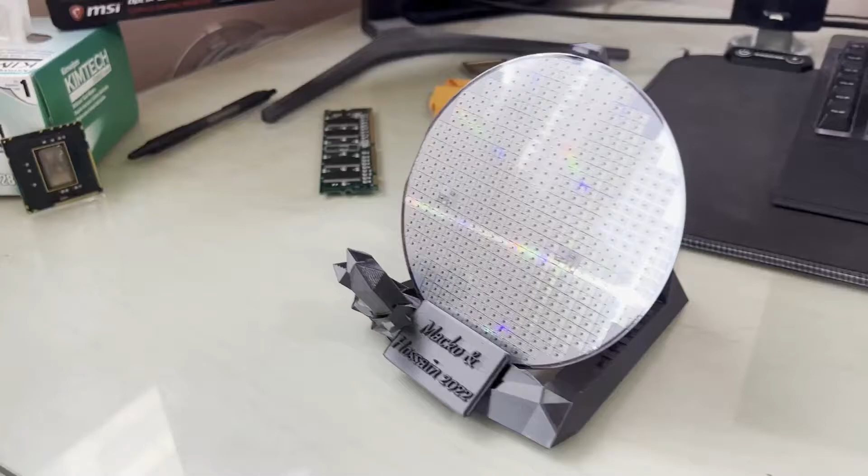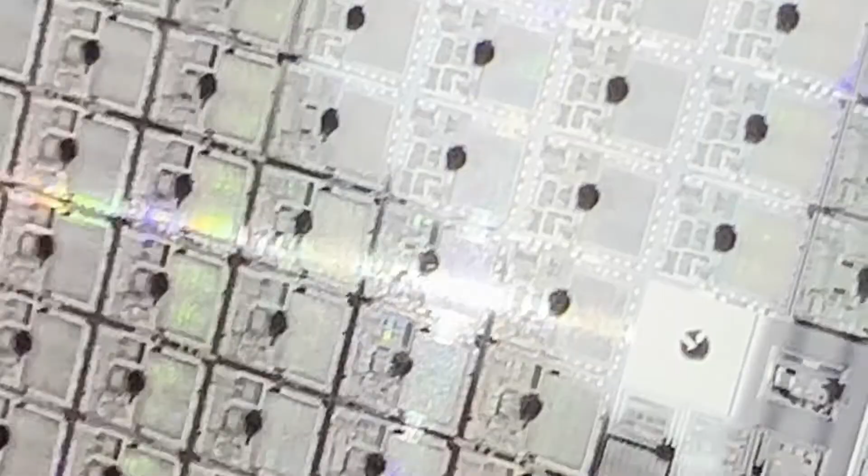So, a while back, I was invited to the wedding of an old friend of mine who used to be a silicon design engineer for Advanced Micro Devices, or AMD for short. I wanted to make something personalized for his wedding, and given that he was a silicon design engineer, what better gift than a chunk of silicon? But not an ordinary chunk of silicon. Silicon with very, very small, and if it'll let me zoom in, intricate designs.

So these designs, or what you see on this board, ultimately make their way into the silicon chips found in a lot of computers or laptops or mobile phones or even some smart fridges. So the point of this video is to essentially show how I went about designing this gift, the tools I used, I guess you could call it research process, and ideally, if you wanted to replicate this, how could you go about creating your own personalized gift? Oh, and yeah, of course, the other iterations that preceded it as well.

So first off, we need to actually get a silicon wafer. There's a couple different places you can buy these wafers, but most commonly you'll find them coming and going on eBay. I personally bought what I believe is a 5-inch disc, but you can get them as large as 12 if you wanted to. Although I caution buying larger discs because of how fragile they are, and larger objects cost more and are more prone to mishaps due to accidental handling errors. But in any sense, yeah, you can buy one of these or even a set of 5 for around 100 US dollars if it's a smaller disc size, and it's not too unreasonable.

Now, my friend in particular used to work for AMD, and as a result, I tried to find wafers that were meant for the 7 nanometer MOSFET technology node, but unfortunately, the only ones I could find were 12 nanometers that were also from AMD. Nonetheless, I don't think this technological difference is going to necessarily translate into a noticeable visual difference. So on that note, I bought a set of 5 of them from eBay. Unfortunately, the listing is no longer active, but as I mentioned, you can simply go on eBay and find whatever wafers look the nicest to you. It's purely subjective because I doubt you're going to be using these in any kind of CPUs.

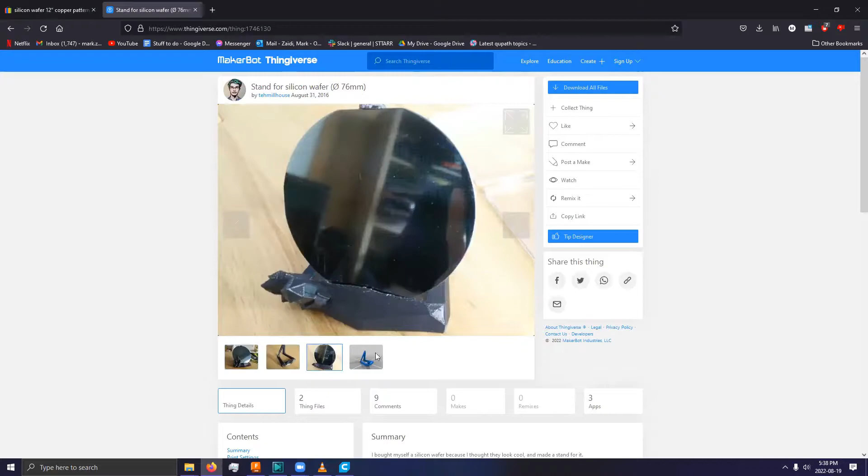Now, the wafers I had were not the same size, and furthermore, I also wanted something personalized, like a little piece of text. So what I did instead was I simply downloaded this design and rescaled it to match the diameter of my silicon wafers, and then modified it slightly in Autodesk to add a nice little plaque around here. But as you can see, the author did quite an amazing job in terms of the design. I really appreciate this little silicon crystal architecture. And as you can actually see, he got the silicon wafer from eBay as well.

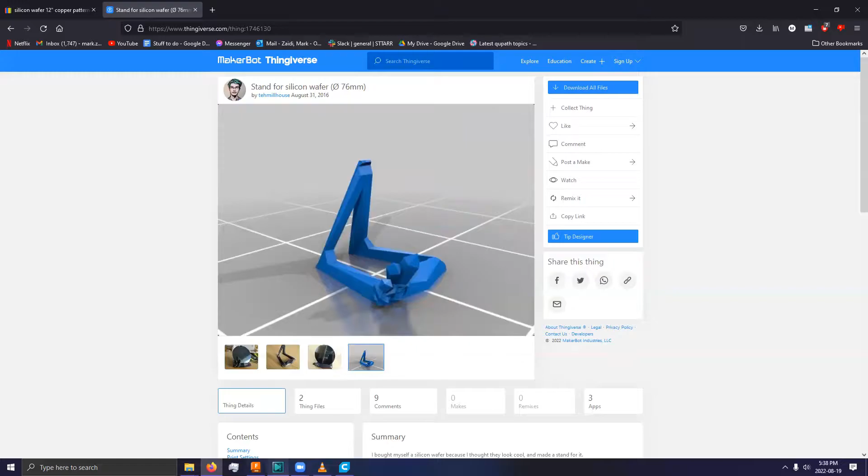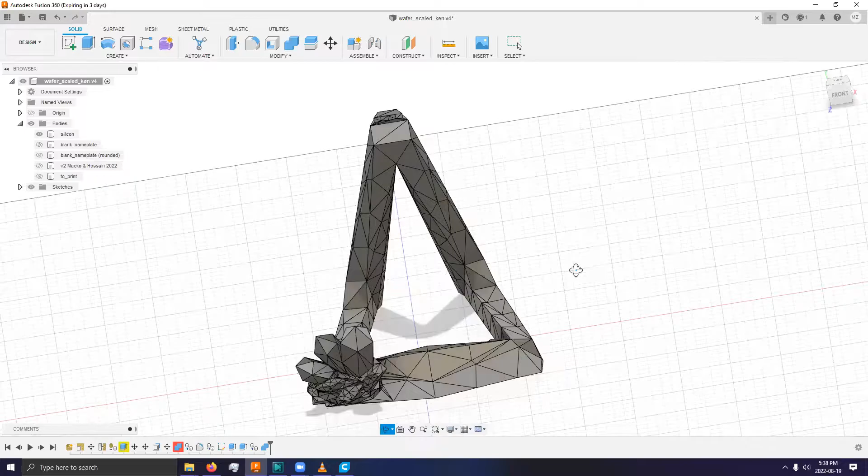Now that we've got this, we can load it into any kind of CAD software. In this case, I opted for Autodesk Fusion 360. After rescaling it, I remeshed the mesh, just to give some nicer, clear polygons. And this is what we have. Now, ideally, I wanted a nameplate somewhere around this area, and this is kind of what you can see. I opted for a nice blank nameplate. You can also round the edges.

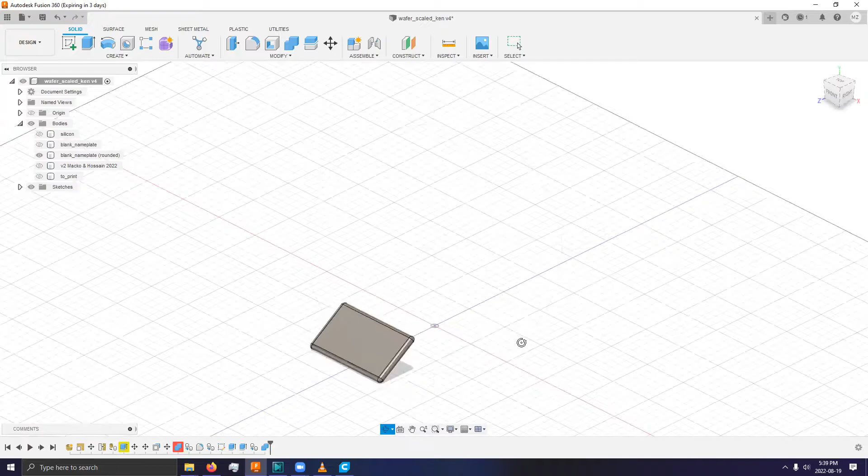Personally, I find rounded edges are generally easier to print with a 3D printer in that, well, rounded edges just appear more rounded, whereas sharp edges never really turn out the way you expect. Usually there's a bit of blobbing on the corners. The other issue is sharp edges, if unsupported, are more likely to fail during a print, whereas rounded ones are just generally easier to print.

Anyways, now that we have a plaque, we can add whatever text we want. In Autodesk, you have the ability to add your own text. I believe it would be under, when you create a new sketch, or you might not even need to create a new sketch. No, you do need to create a new sketch. So yeah, you can create text. There's a wide variety of different font sizes. I like this kind of italicized font, but any font generally will do.

Just, again, avoid any sharp corners or fonts that have very thin lettering, because the resolution of the printer, at least laterally, is about 0.4 millimeters. So, it's a cheap $300 Ender 3 with some modifications to it. It's not going to print outstanding quality products. But working with what I had on hand, this seems to be a reasonable size. And then we finally combine the two together, and we'll get something like this.

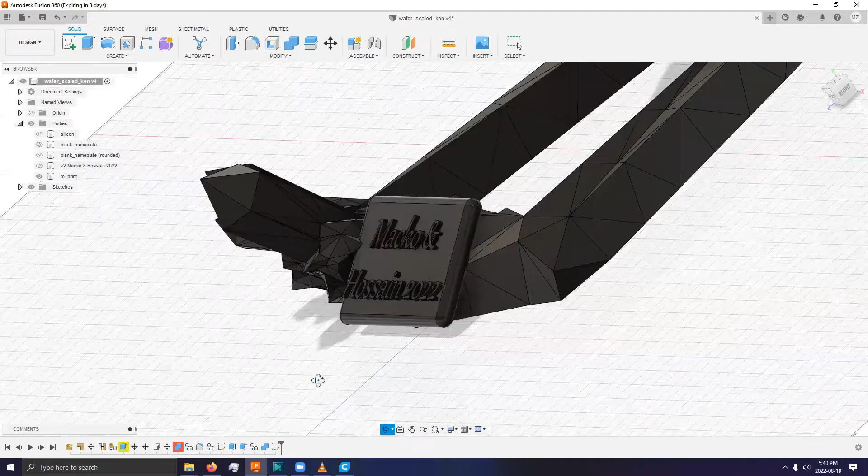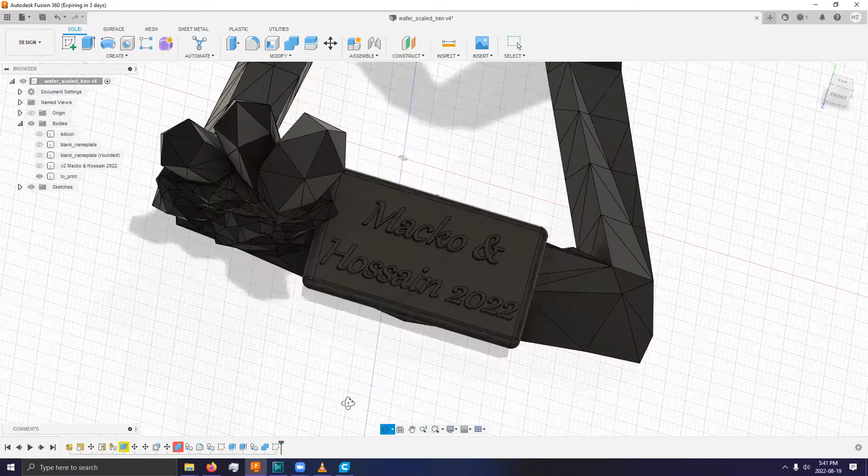Ignore the change in color. I was just trying to render some different materials. But yeah, you can see it seems pretty nice. And of course, in rendered software, it'll have an amazing gloss, which when you 3D print is almost entirely lost. But you do have a bit of interesting patterns in terms of the way light scatters when you look at 3D printed objects, given that they have layer lines that are fairly small.

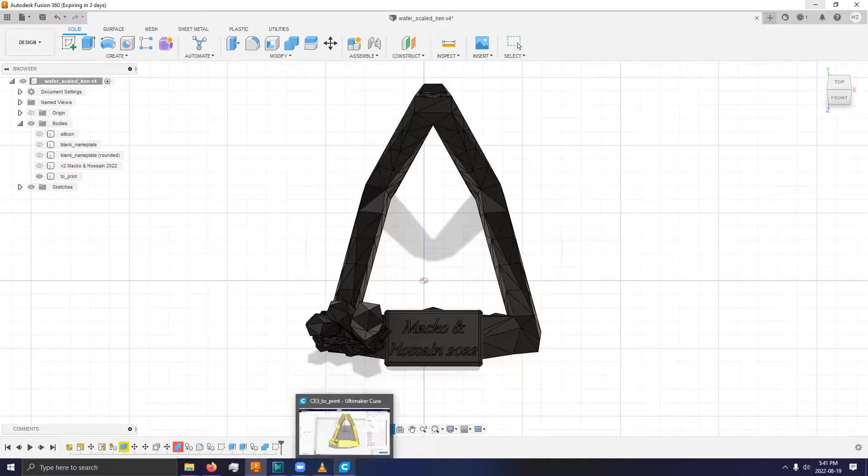So now that we're all set on our design, and also I can make this file available on request if you guys wanted, but I don't know how much of a demand there is for something as specialized as this. Anyways, now that we have our design, the next thing is to actually set up the print.

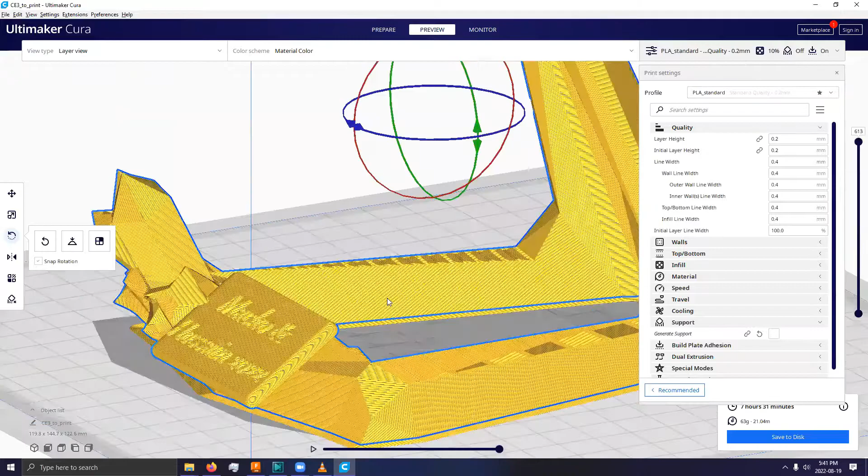So when we load it in Cura or whatever print software you intend on using, you can slice it with a 0.2 millimeter resolution. Personally, I usually try and test stuff out using 0.2 millimeters, but then for the final product, I usually opt for something lower, like 0.1.

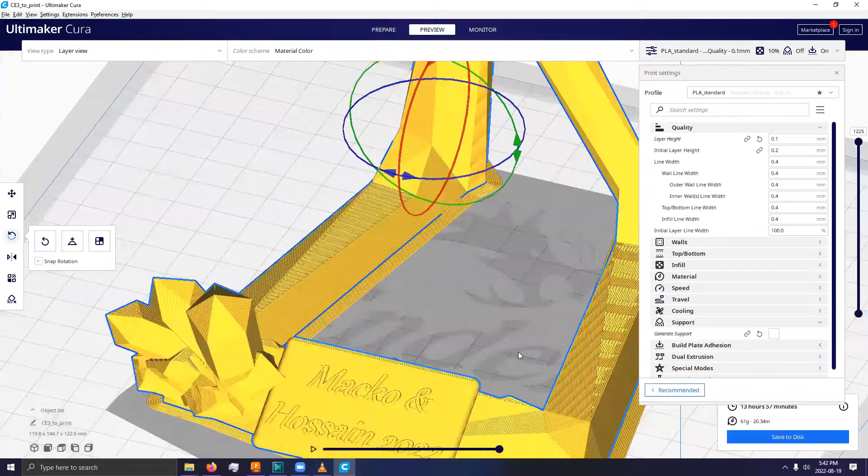Now, of course, it'll take longer to print, but generally the amount of plastic used will remain more or less the same. And at the end of the day, unless you have a huge backlog of stuff you wanted to print, a print that takes 8 hours or a print that takes 16 or 13 or however many hours, it's not going to make a big difference. And you do have a nice higher resolution.

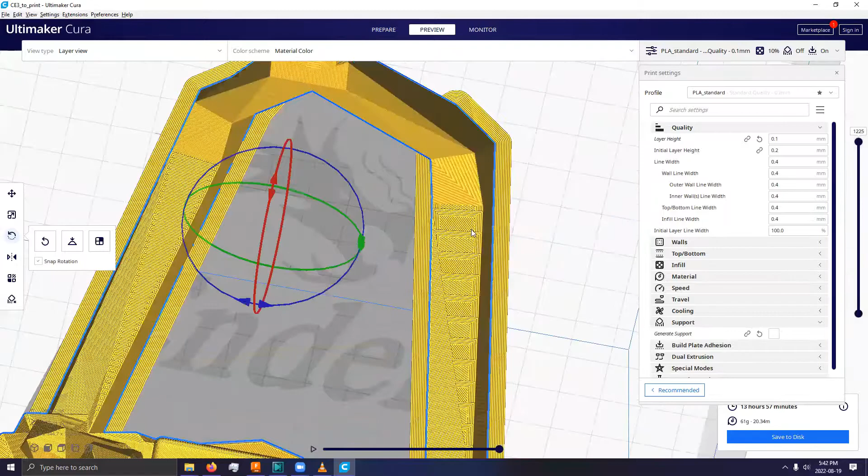Like, as you can see, the steps over here are a little bit more frequent. And at the end of this video, I'll show some examples of the finished product, but it's much more noticeable, the kind of shiny gloss effect from the very, very small layer lines, as you can see here. So on that note, unless I'm missing anything, yeah, I guess we'll call it a day for now.

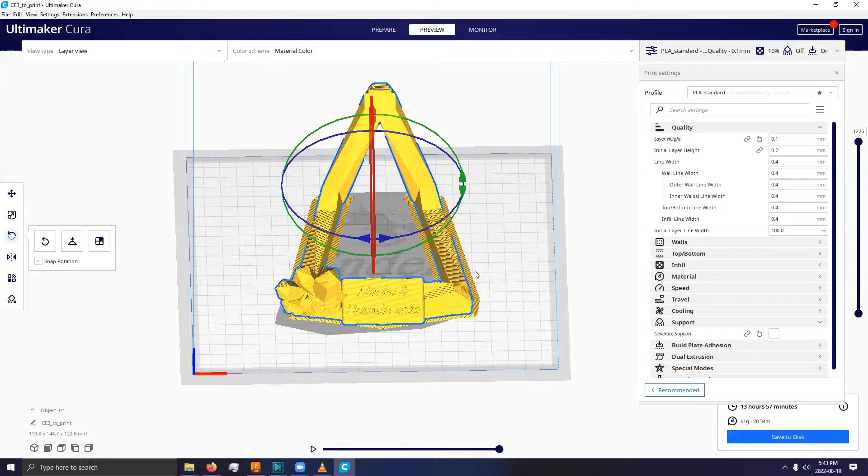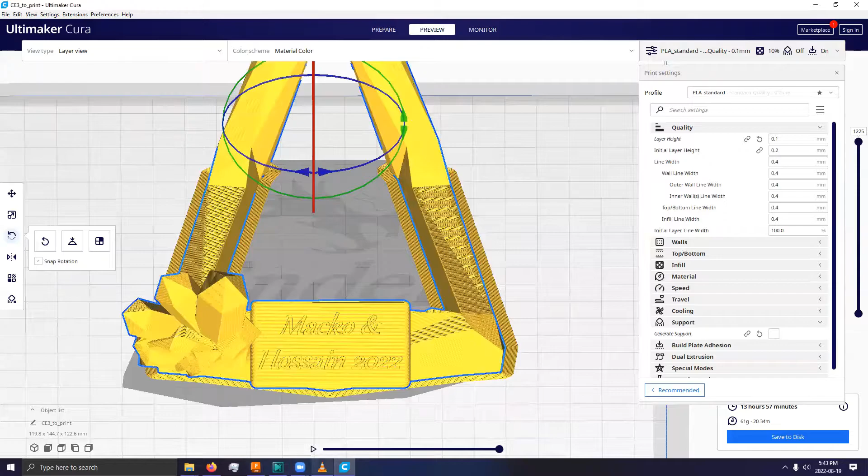And then I'll quickly show off some examples of the finished product with one silicon wafer that I might give. I still haven't decided which of the 5 looks best, so I'm also open to feedback. I was also thinking of painting this text over with a nice gold color, just to give a little bit more contrast between the actual text and the nameplate itself.

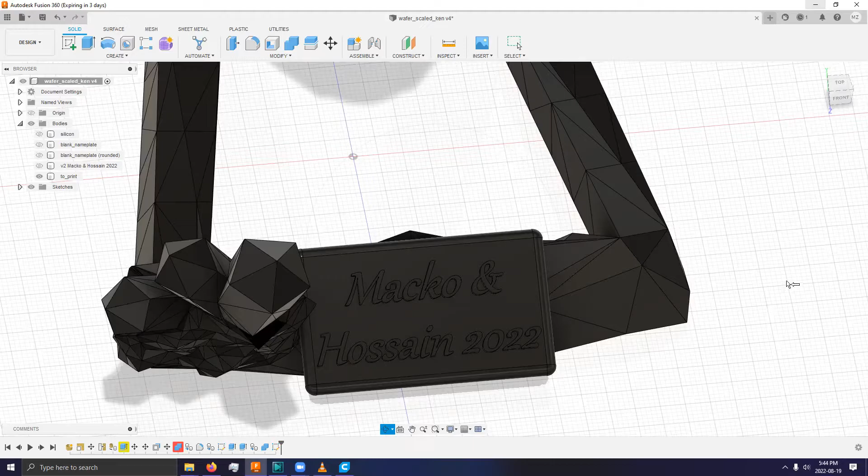Only challenge here is it's a manual step. If I have to go in with acrylic paint, I'm very prone to making a human error. Any slight human motion that might perturb the setting of this acrylic paint can make it look relatively poor quality. So I'm still thinking of a good way to add gold lettering without having to use a very, very fine brush and carefully paint over the lettering. But if it should come to that, it's understandable. Anyways, let's take a look at some of the finished product.

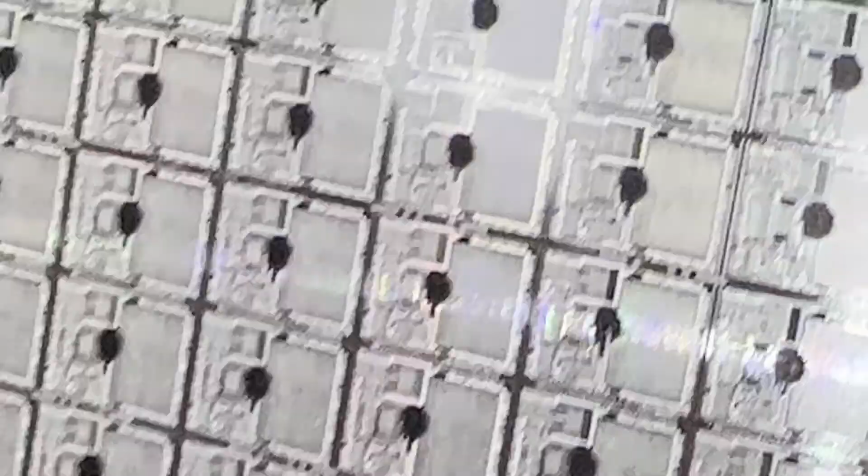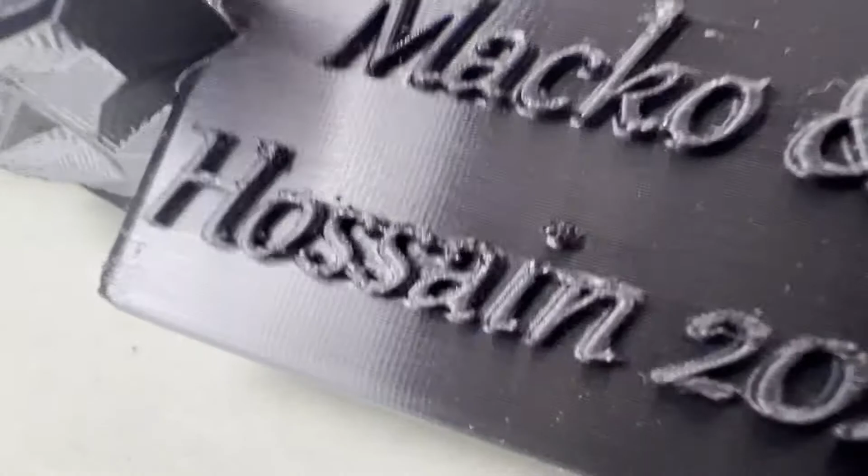This is one of the 5 wafers that came with the order. Nothing really wrong with the wafers themselves. Honestly, they're great quality, very interesting designs, beautiful iridescence. Now the actual print itself, the text isn't perfect. It's definitely legible, but as you can see, the I in Hossain kind of blobbed up a little, as well as some smaller pieces of text. Again, not the end of the world, but going forward, I might have opted for a different font.

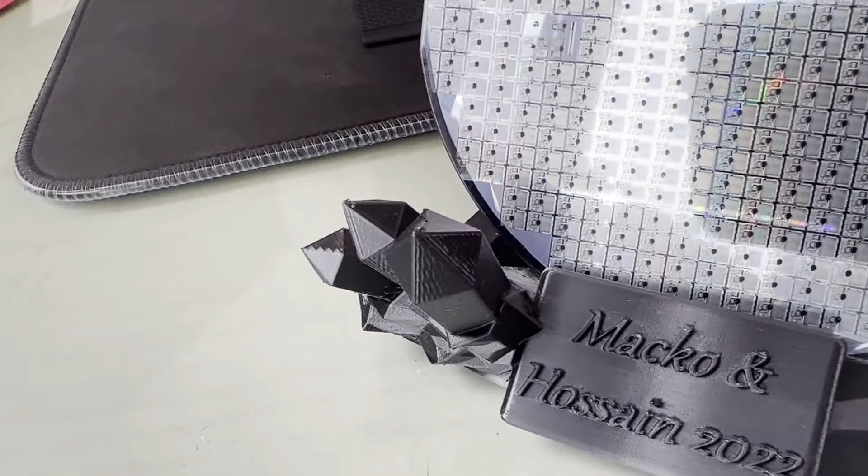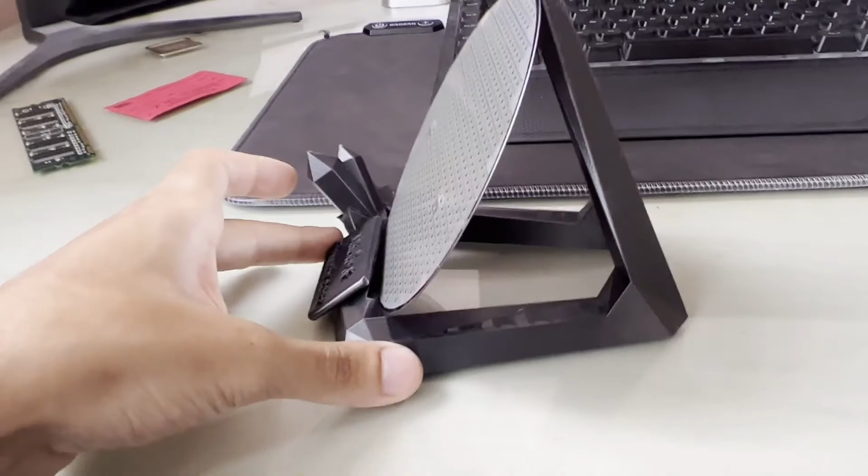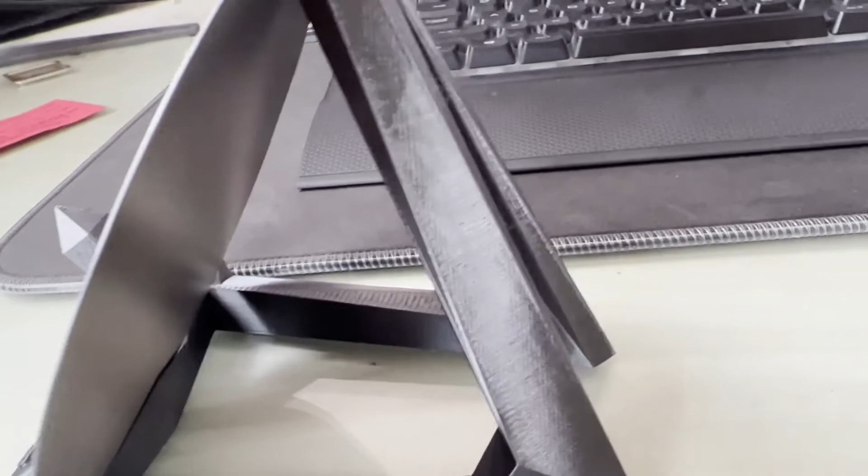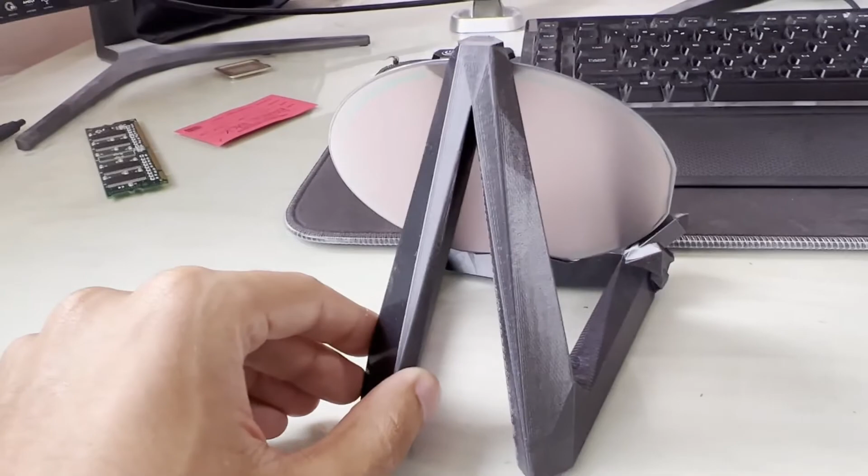Now, if we look at the crystals, they're pretty good, as long as you don't zoom in super into a corner or something. If we take a look at the back, also very nice. And yeah, this is the kind of, well, not iridescence, but reflectance, scattering of light, I don't know what the proper term would be, of having a 0.1 millimeter layer height. So it gives this nice kind of glossy finish, but at the same time, it's not glossy. It's really hard to describe because I haven't really seen this kind of texturing on any other materials other than 3D printed parts.

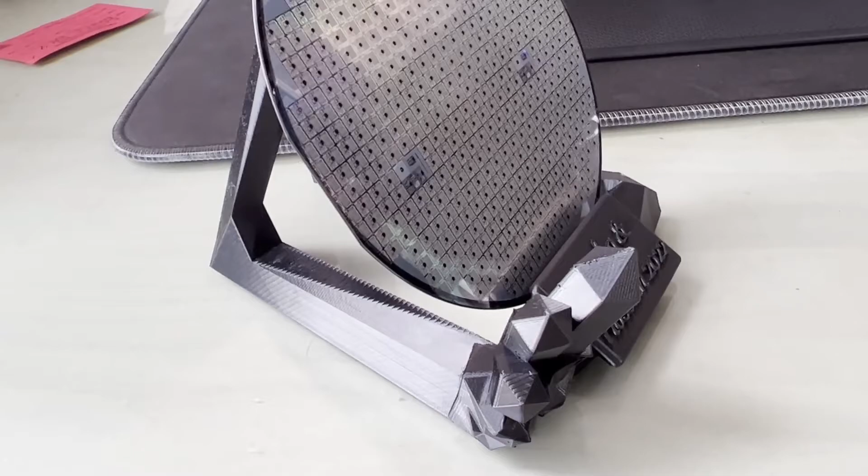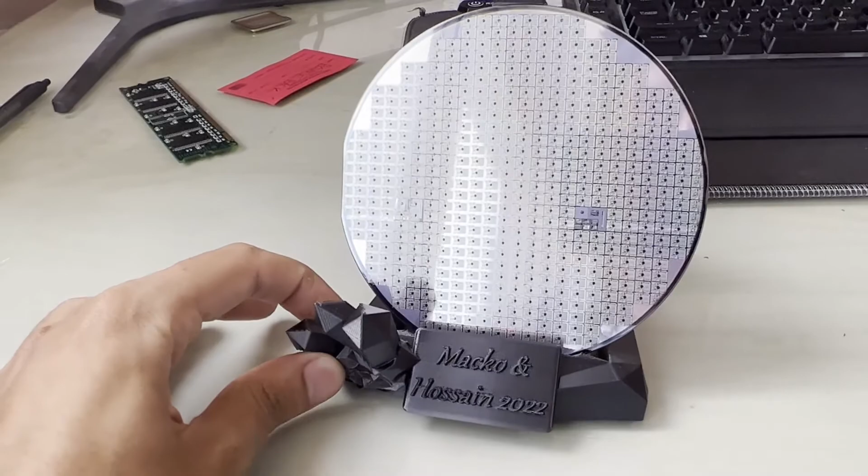In particular, I opted for a high gloss filament, so I believe it was Ultra Silk Black from Eryone. They also have the gold version, which I briefly showed. But yeah, overall, I thought this was a fairly fun project. I hope he enjoys it as well. And of course, his future wife-to-be is probably not going to be so excited just to get a simple chunk of silicon. So I'll also toss in a $100 Amazon gift card.